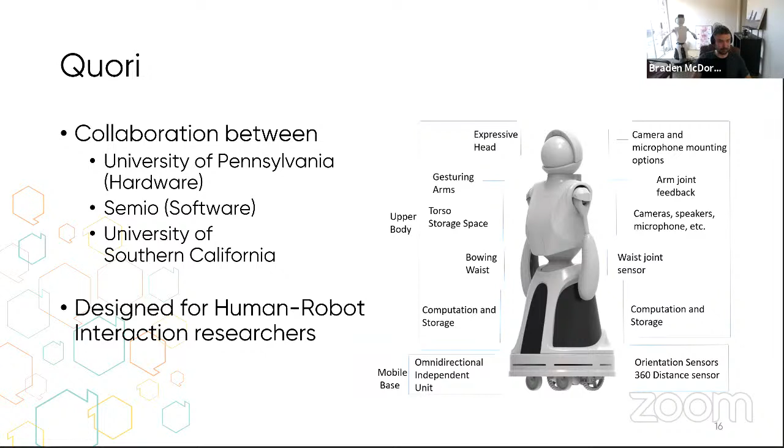Now, robots are challenging, and I'm sure this is no surprise to anyone that's played bot-ball. There's a lot of things to consider. Software, of course, is always difficult. There's hardware and electronics, so both can be very fickle and difficult to get right. There's mobility, so moving around the environment, and there's manipulation, picking up and grasping objects.

There's sensor and actuator inaccuracy. So when you get a value from an analog sensor on your bot-ball robot, for example, it's probably not the exact value. There's probably some noise there. So we have to think about that at all levels of the system all the time.

And finally, there's physics and mathematics. These aren't virtual characters in some video game. These are real physical objects that could easily tip over or break themselves if you're not careful. So the tools need to understand the limits and the physical constraints of all of these pieces of the robot to function effectively. There's also mathematics. So there's a lot of very complex, graduate level mathematics that goes on to make these robots function. So it can be very challenging for someone that's not very acquainted with that field.

Social robots are very challenging. So we take everything that was challenging about a regular robot, and we add on the natural language. So we need to understand what the user is saying, how they're moving, where they're looking, all these different social cues. And we also need to generate the same things in kind. So we need to generate speech, we need to generate body language, we need to generate natural eye gaze behavior, and more.

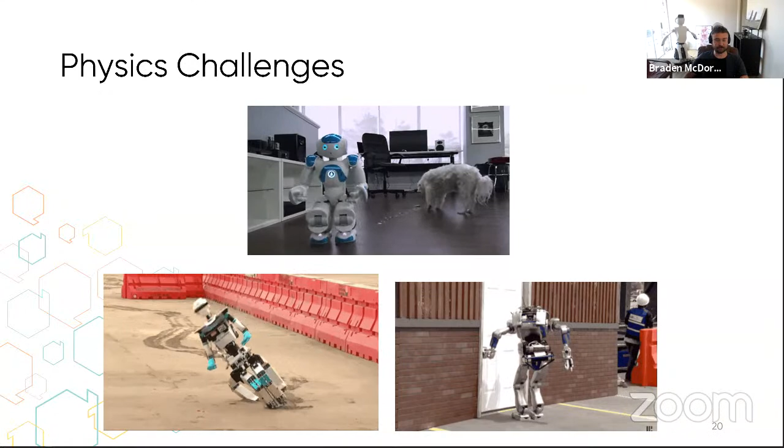There's a lot of challenges when it comes to physics beyond just balancing, of course, but thermal properties. Is the robot getting too hot? Is a particular motor getting too hot? There's a lot to think about when you're designing these systems.

There's privacy challenges, which we briefly mentioned. Basically, a social robot is an interconnected camera and microphone on wheels in your home. Obviously, very dangerous. And privacy has to be considered as a result at every level of design.

So there's a few possible solutions to this. We can do as much processing as possible directly on the device. We can sandbox as much of the software as possible. If you aren't familiar with the term sandbox, basically we're encapsulating the software in kind of a protective shell, so very few things can interact with it. So even if the hacker did get into the system, their area of damage would be severely limited.

That's very important. And finally, getting true affirmative consent from the user for data collection. We're not going to hide the stuff behind 20 pages of legalese in a license agreement. They need to understand in plain English exactly what data we're collecting and how we're using it.

And finally, we're getting to the beef of this talk now. How do we make it work? How do we make a social robot? Well, the first part of this is speech recognition. So we're going to need to understand what the user's saying.

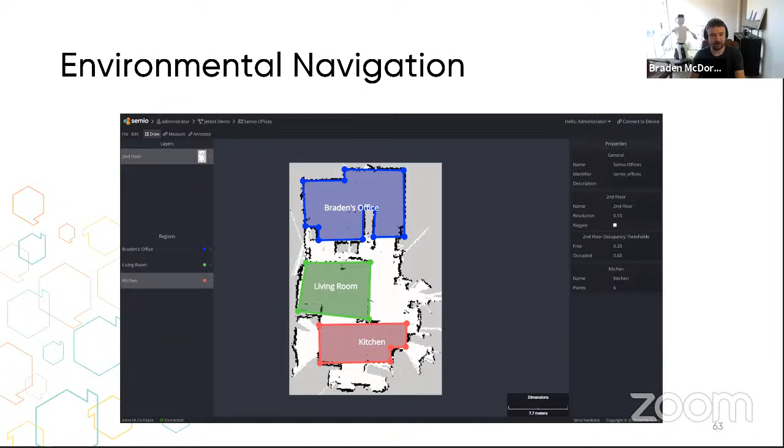Okay, so what we've done here is we've labeled a map. This map was taken basically using a LiDAR or something similar. You have the robot move around the environment and you can build a map like this. But now what we can do is label this map and say, this is my office, this is the living room, this is the kitchen. And now our robot can actually navigate. So we'll shortly go through this video as well.

Go to Braden's office.

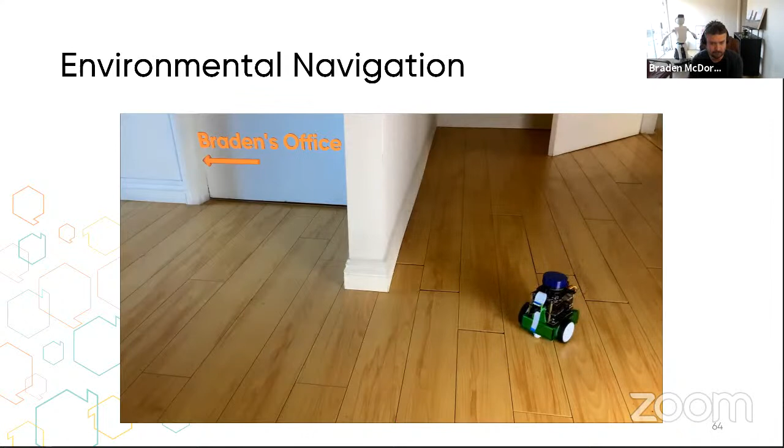So this system allows us to navigate around the environment in a very intuitive way for the end user to label their environment with certain regions. And these could just be basic regions, like this is the kitchen, but they could also be speed limits and other constraints. When you're in this hallway, you can't go faster than 2 miles an hour or something.

So this is a very useful utility for end users. Finally, there's social navigation. So where should the robot position itself relative to a user when it's talking to that user? There's several things to consider here. For example, the robot's microphone might hear best from a certain distance. There might be noise in the room. In that case, we probably need to move closer, even if we're starting to violate some of those social and cultural norms.

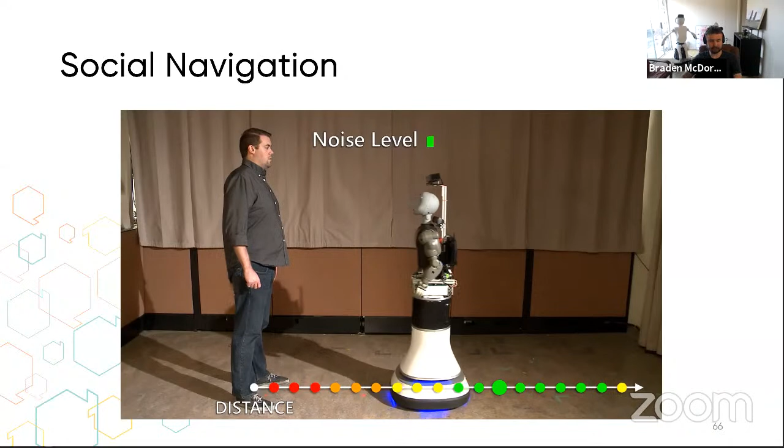So that covers Semio. That's what we're doing, and we'll be continuing to do for quite a while. There's a lot of moving parts in this system. There are entire segments that we need to explore on how we're going to make a social robot behave a certain way. But hopefully that gives you a taste for some of the problems that we solve and how we go about solving those problems.

Finally, I want to talk briefly about the KIPR simulator. It should be live, hopefully very soon. Tim was working on it right before this call, but this is an amazing piece of software that we've been working on - Tim, myself, and Nofis, who you heard from earlier. There's a full 3D simulator for the robot in the browser. So we're very excited to share this and get your feedback on it.

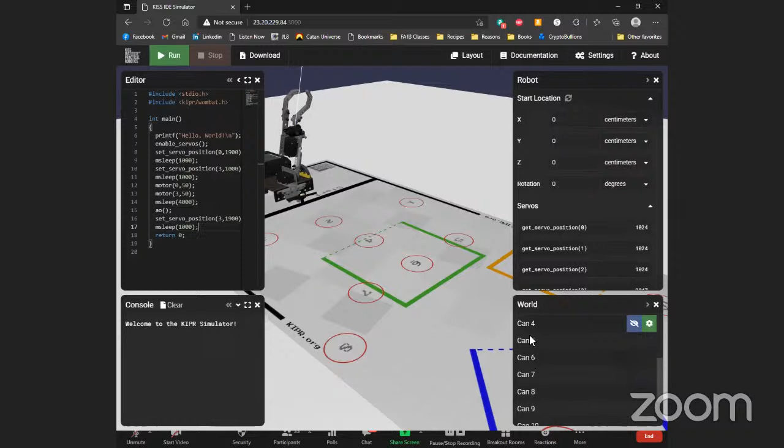Sorry, Tim, I should have given you a canned one ahead of time, so you'd know and you'd had a canned program ready. Yeah, it's almost done though. Let's do Can 6 maybe. Let's see how close we get. At least you can knock the can over. It'll be exciting. Yep.

Live demos, you never know. And that white line you can see there, that's actually the line for the analog sensor. Oh man, pretty close, not quite though. Yeah, hair too far.

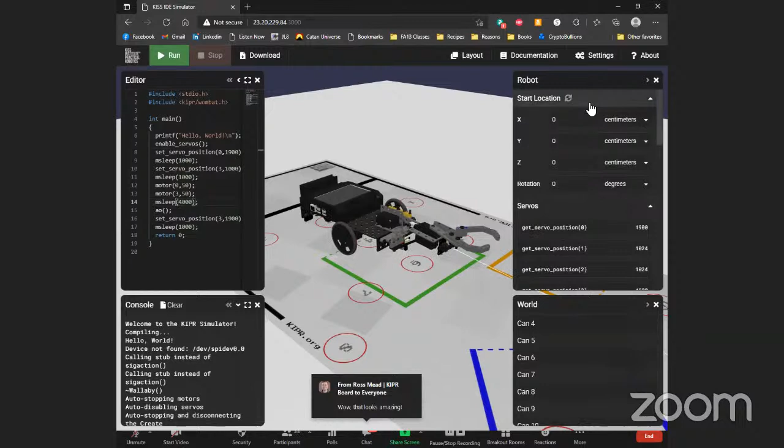So it interacts the same way, hopefully, that a normal robot would actually work. Here, we'll reset and try again.

Even those of us that have been doing this for a long time still sit here and try to get the robot to do the exact same thing. I can tell you from experience, I've sat down to play with this at night because I usually test it out every day to see where things are at. Five hours later, everyone's asleep, everything's going, and I'm like, oh, I better go to bed, because I've been playing on the simulator. It's a lot of fun, especially with the physics and everything in there, and the sensors and servos working.

There we go. It's not lifted up, I guess, but yeah, cool.

Please test it out for us over the next month or so and give us feedback. We've already got a decent number of features that people have requested we add, but we also want to hear from people that haven't tested it yet. Just the other day someone told us, hey, I don't see the servo positions anywhere on there, and we were like, well, we forgot to put that in, so we had to get that added really quick. We'll hopefully be providing updates as people give us feedback, and it'll be a continuous process.

To access it, if they already had access through Bot Academy, we're going to extend that access through at least the end of August, so you have time to play with it. Even though you may not be running a bot team yet till a month or two, or maybe not till January, play with this a little bit, take some time, let your class use it, and give us some feedback. We think it may be a pretty valuable educational tool.

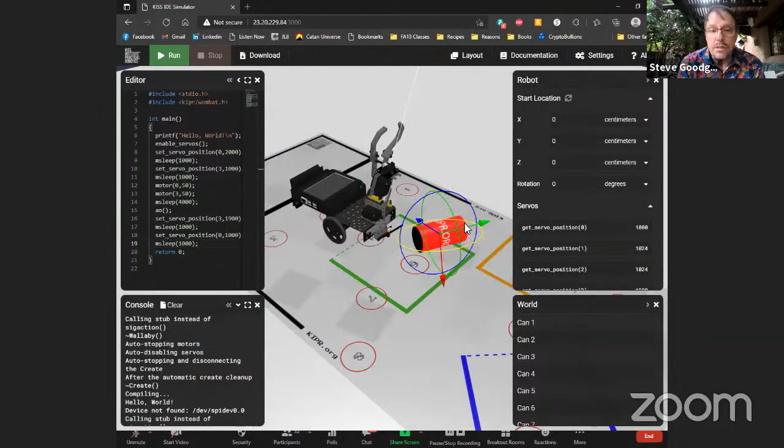And coaches as well, I'll throw it out there. Any coaches that want to help out, this is nonprofit, all open source software as well. Anybody who wants to help out, come on, jump on board, and we'll kick it down the road a little bit further. But I think right now it's going to be a fantastic educational tool. If I was still in the classroom, I would definitely take advantage of this. So, all right, Tim, great job.

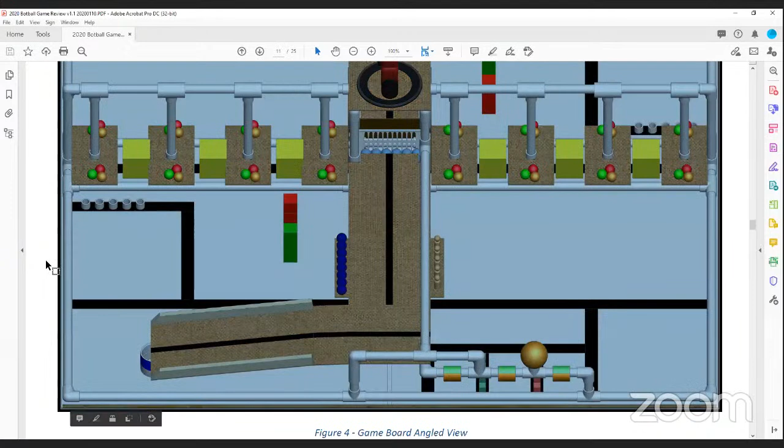Thank you, no further questions. I have a question, are we going to have 3 links to Zoom then, 2 for the cameras and 1 for the computer?

So if your computer does not have a camera, I'm trying to think. Well, our computer has a camera, but it's not going to be able to see the entire table. The webcams, you're not going to be able to see the entire table. Is it possible to put that computer in a spot further from the table so it can record the whole table? Because that would be good for a stationary one.

Yeah, we can only hook 2 cameras up to Zoom, right? That's what we prefer. If you can't get around it any other way, then you can always join a third, but we're asking teams to try and only have 2 cameras on Zoom.

Our problem is going to be the laptop. It needs to be connected to Zoom, but it's not going to help us with the camera. So what's your mobile camera? What are you using, a phone or an iPad? Yeah, we were just going to use a phone like we did last time.

Okay, you can just stand up and hold the phone as long as you can hold it static and see the whole thing. That's what we did last time, but we used that camera to move around to score. We didn't have 2 cameras on the table at all times. Okay, I mean, so that's fine if your mobile camera and your stationary camera are the same one.

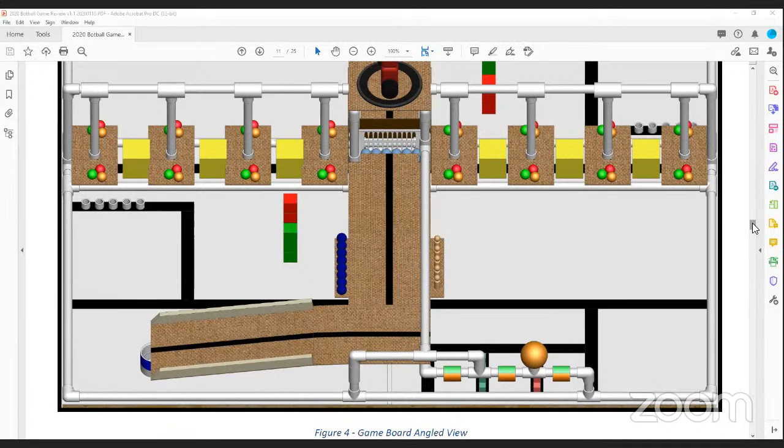Sorry, can I ask a question about the schedule? Because it says here the double elimination will be held during the 4:30 to 7:30 here in China. However, in our laboratory, the lights or the sunshine will shine directly onto our game board, and so we could not calibrate and could not start the robot.

Okay, so what I would recommend in that case is either set something up to block the light that's coming towards the table, so that it's not direct sunlight coming through the windows. You could try setting up sheets or something like that; that's usually enough to get most of the light that might be affecting it. You could also just have people stand in front of the table to block the light from coming in, and hopefully they all stand real still.

So that's, yeah, those would be the options I would think of. So perhaps we will put up some board here and we will move it as long as it started, but when it starts, it might block part of the camera. Is that fine?

Okay, so would the camera be behind the boards that are being set up to block the light? I'm not sure, because at 4 o'clock or 6 o'clock in the morning, the sun will shine directly and we will block it in the way that the sun goes. We will try to place the camera so it doesn't block it, but this morning we found a case where it will block the sunshine and block the camera. And if it doesn't block, then it just could not start.

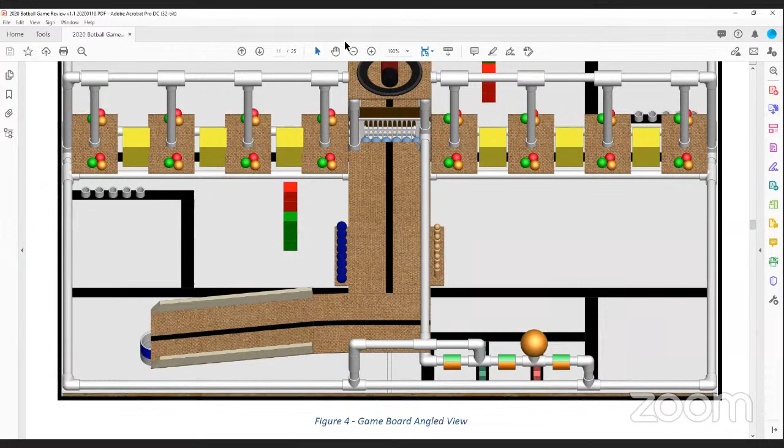If the material transport is resting on one of those green or red cubes, but is completely inside the tape, is that a problem? Gosh, let me take a look. I can't remember exactly what the rule on that one was, can't remember if it's supposed to be that it has to be flat on the table. I think that's the first time we've had that question.

I'm not seeing anything actually about it, so I'm assuming we decided that it could be on its side. I think it just has to be touching the surface. So I think that's really the only main requirement there is — the material transport actually has to touch the surface.

Fred, do you have any other questions? Are you feeling comfortable? Yeah, everything is good. I would just note everything, I will share it to the Chinese coaches. It's fine. Okay, thank you. Yep, good, good.

Another question? We are not using the color pointer, but may I ask, is there an order for the color pointer — should it be clockwise or counterclockwise for the color? For the color spinner thing, it should be the black facing in towards the table and the green facing up. So black facing in, green facing up, black facing in, green facing up. So even if we are not using the color pointer, we still have to change the color into the right order, right?

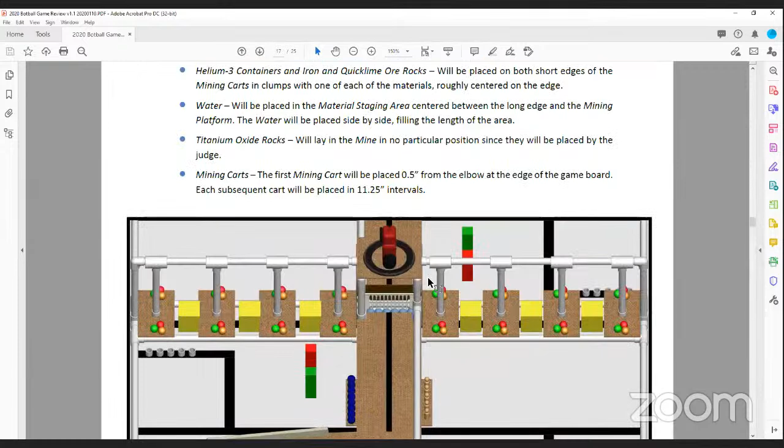Let me check again — if the black is facing the side, then the green is upside, and then the orange, and then the red one? Yep, so black faces in, green faces up, red faces down, and orange faces out. Let me see if I can find the picture again. You can't really see the black and the red in here, but green up, orange away from the table, the black facing in towards the table, and the red is on the bottom facing down. Okay, thank you, we're changing it right now.

Another thing to note, for general setup tomorrow on the game table: the red, orange, and green poms that are on the mining carts, you can roughly place those on the edge. If the judge thinks they need to be moved, they'll let you know, but usually it's just pick the three of them up, put them in a clump, and put them there so they're all touching the minecart. They're randomized and not in a specific order like the picture shows. If we see that all of them on your side are exactly like we have them in this picture, or all facing the same way, we'll say pick them up and randomize them a little bit more.

All right, any more questions? I had one more question about very special conditions.

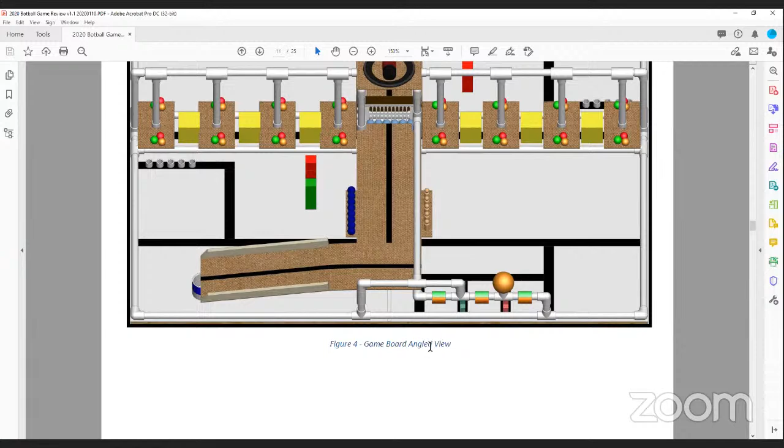Okay. I was looking through the iRobot documentation for the Roomba, and there are some things that they say it can do that aren't in the workshop slides. Is there a way for us to access some of those, specifically the song and play functions?

Yeah, so I'm trying to think. I believe that if you look through the documentation, like for the create itself, there should be a function that can call the different codes that the Roomba can take, and you can use that to play songs and stuff like that.

Okay, thank you. I can't remember what it is off the top of my head, but I know that thing is there in the documentation.

If you're on the Botball Discord, I would recommend just posting the question there, and someone who's probably already done it before will post an answer, or one of us will get back on there and let you know once we know what it is. But oftentimes you can get a quicker answer from the community there.

All right, thank you. Yep. We used to do slides on how to make music. It's been a while since we had them.